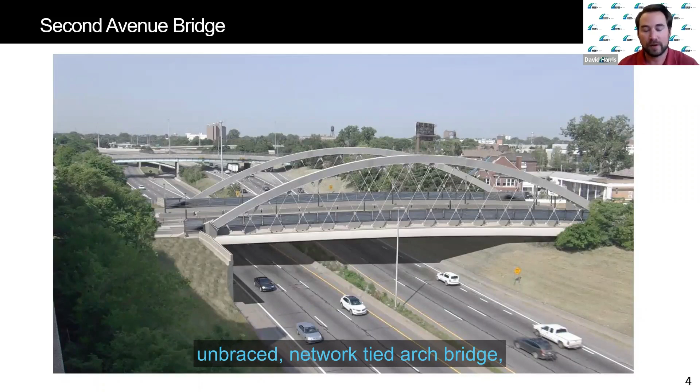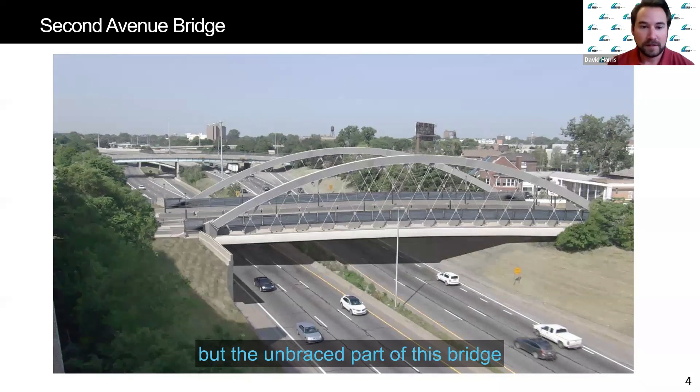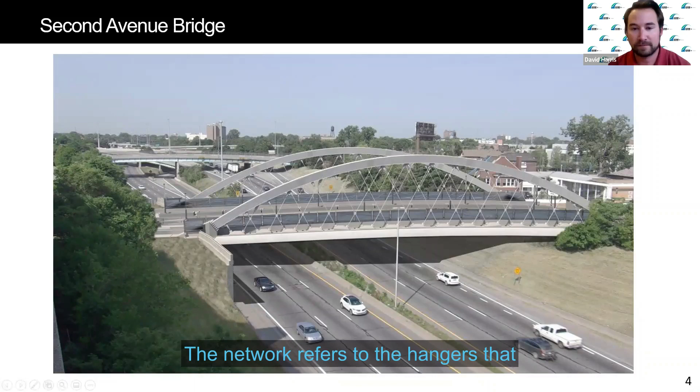I'll try to explain what that is a little bit here without getting too much into the weeds. The skewed part you'll see in another slide or two, you'll see what the deal is there. The unbraced part of this bridge refers to the arches and how they are not connected at the top. The network refers to the hangers, the hanger cables that you see in the crisscross pattern here that connect the arch to the concrete at the bottom.

I guess the tied arch part of this structure refers to how the arches anchor into the corners, the four corners, and then is connected with a tie girder, a concrete tie girder, across the bottom there.

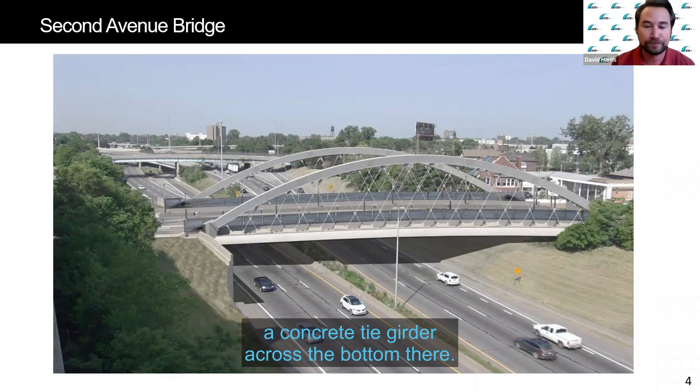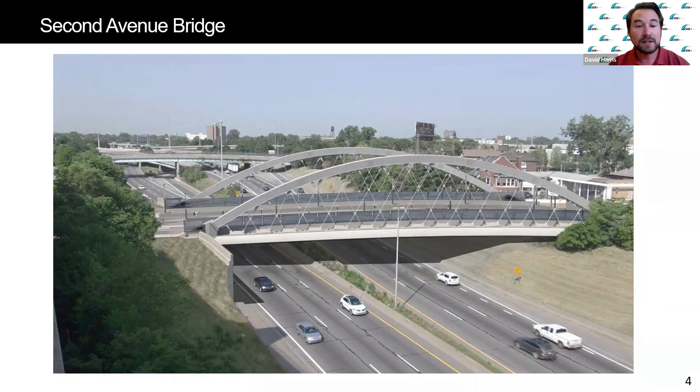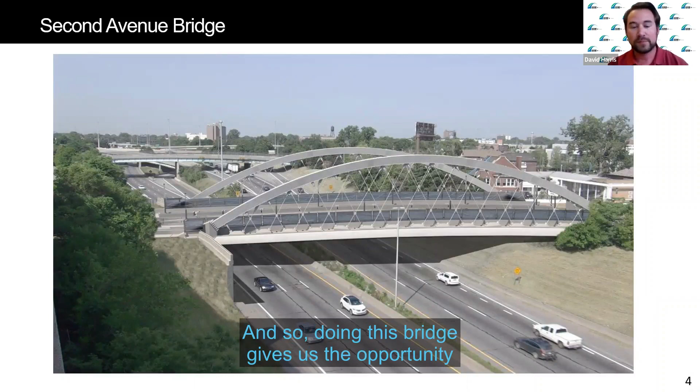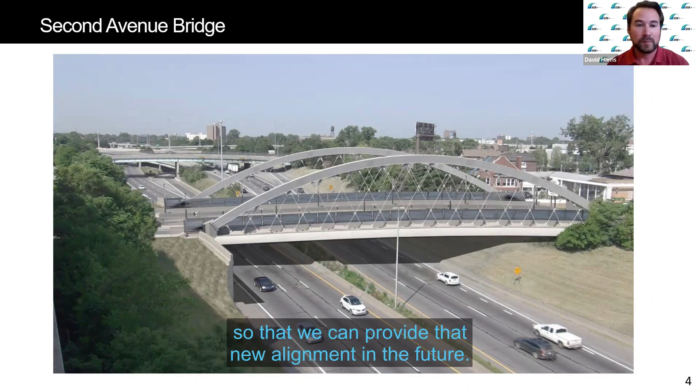This structure was chosen for 94 in this area because of the future interchange that we're going to change there at the Lodge. Could you go back there? Thank you. So for the interchange there on 94 at the Lodge, we need to have flexibility to be able to change that interchange with I-94 going under this bridge since it's so close. Doing this bridge gives us the opportunity to not utilize the center pier or any other pier supports in the I-94 freeway area so that we can provide that new alignment in the future. All right, next slide, please.

So as Bradley mentioned, we're building this bridge off-site in Wayne State University parking lot between Anthony Wayne and 2nd Avenue along Palmer. The first major reason why we did this is due to safety. We didn't want to have some of these major things going on building this bridge anywhere near traffic or people.

Thirdly, one of the other reasons why we did it this way is because we could build this part of the structure in the parking lot next to the freeway while also building the abutments or foundations of the bridge along 94. So those are the three major reasons there.

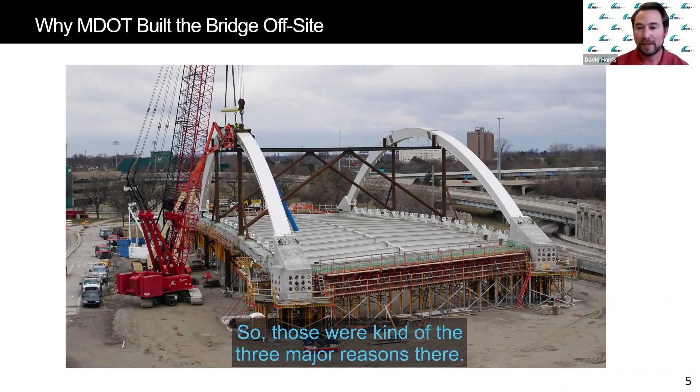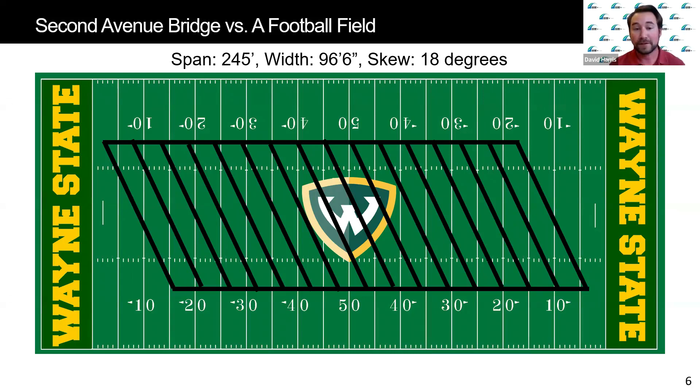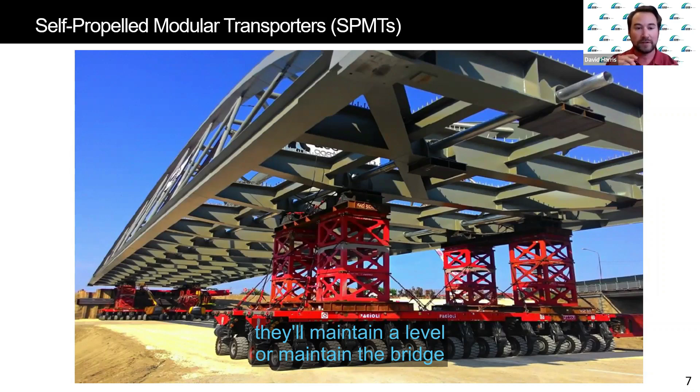So how are we going to move this bridge? That's with these self-propelled modular transporters, or SPMTs. What essentially will happen is we'll lift the bridge up using hydraulic jacks in each corner, then drive these SPMTs into place and set the bridge down onto them in the parking lot. These SPMTs are all interconnected by one operator who will essentially drive the bridge into place over 94. They're automated in a way so that when driving over the grade, they'll maintain a level and keep the bridge level so we won't have any twisting or racking, which could damage the structure.

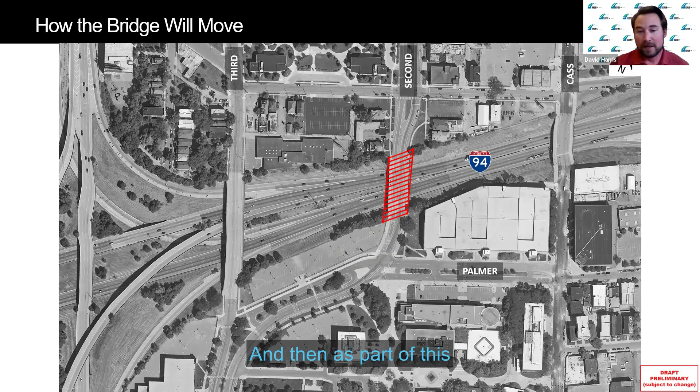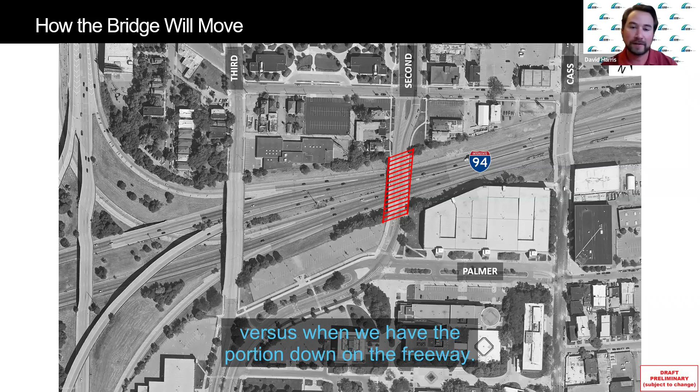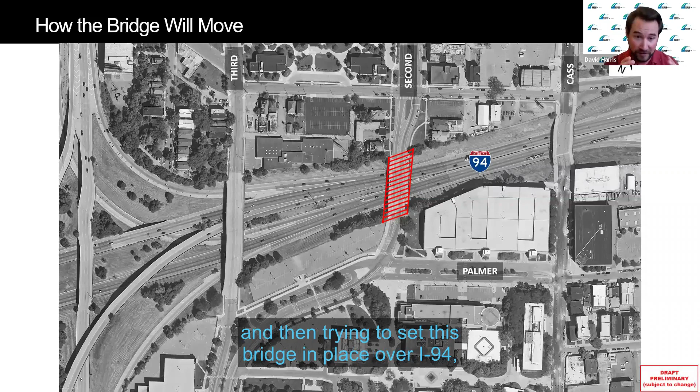As part of this, there's going to be a lot of setup and takedown with those SPMTs — taking things apart and putting them back together for when we have the portion in the parking lot versus when we have the portion down on the freeway. In all, the move will probably be about a day up top in the parking lot actually moving, maybe a day on the freeway actually moving, but there's going to be a lot of moving pieces setting up, taking down, and trying to set this bridge in place over 94. That's going to take a lot of time before we're comfortable opening to traffic.

And I think that segues into this next slide — we need these closures, a 7-day closure on 94, and then later another 5-day closure to be able to do all of this safely. That's the key thing here with this move.

We want to make sure that we're able to thoroughly inspect this thing from start to finish, from when we pick it up all the way to when we make the turn at Palmer Ave, 2nd Ave area, and then when we launch it across the freeway. We need to make sure we're not seeing anything that gives us concern, so we can take care of it before we get it over the freeway. We're trying to make sure everything's looking good on this bridge at every step.

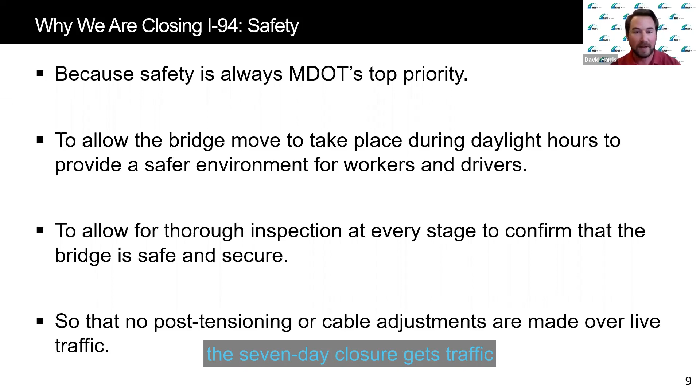The 7-day closure allows the workers to work during the day, and allows our inspectors and designers to watch this thing every step of the way. The 7-day closure also gets traffic out of this whole area between the Lodge and the I-75 freeways along 94, so no traffic will be anywhere close to this thing when it's moving, meaning there's no conflicts there.

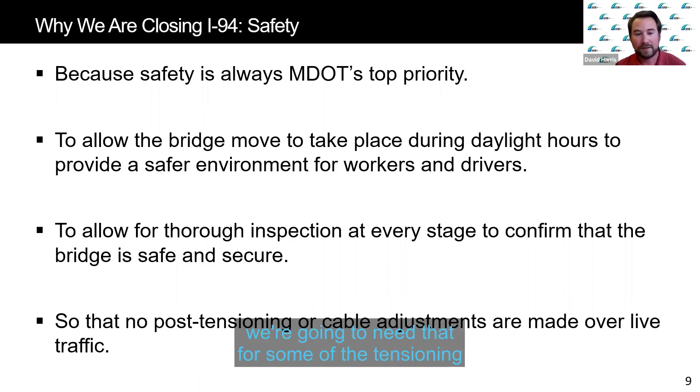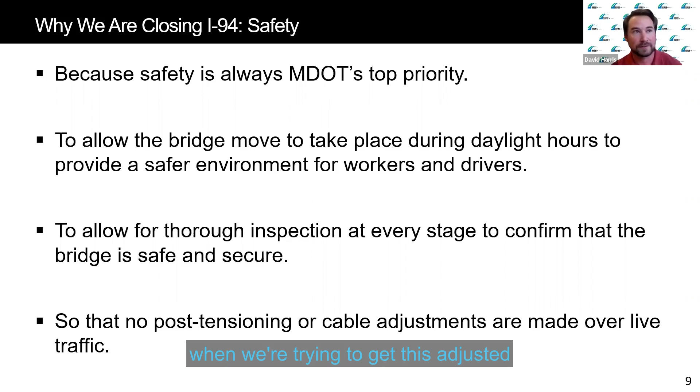And then there's that other 5-day closure I mentioned, which we'll need for some of the tensioning and cable adjustments we'll need to do on this bridge later on down the road. We don't want any traffic near this thing when we're trying to get this structure adjusted to its final resting place.

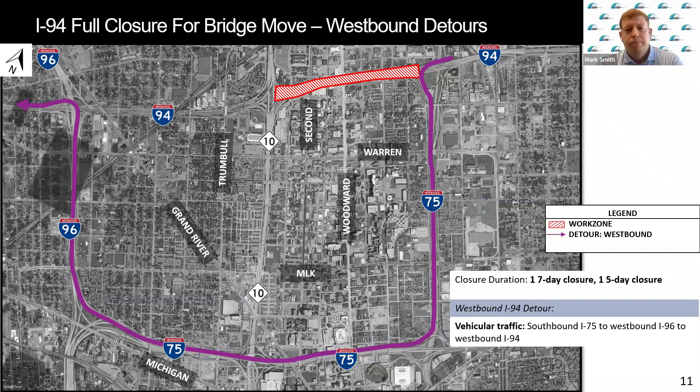For traffic on I-94 westbound, traffic will be detoured as they approach the I-75 interchange, with signing directing them to follow I-75 south and continue through the 96 interchange. At 96, you will get on westbound I-96, which will then take you back up to westbound I-94. Next slide.

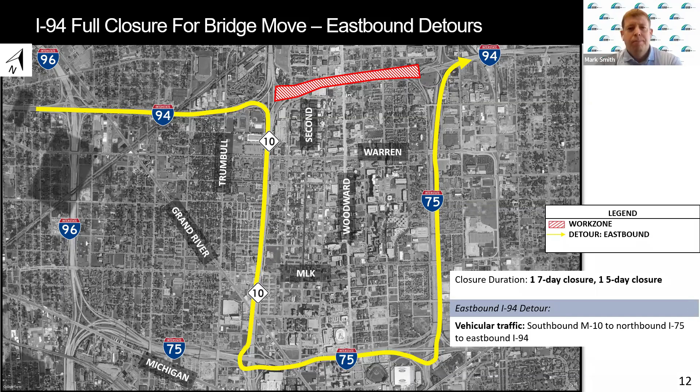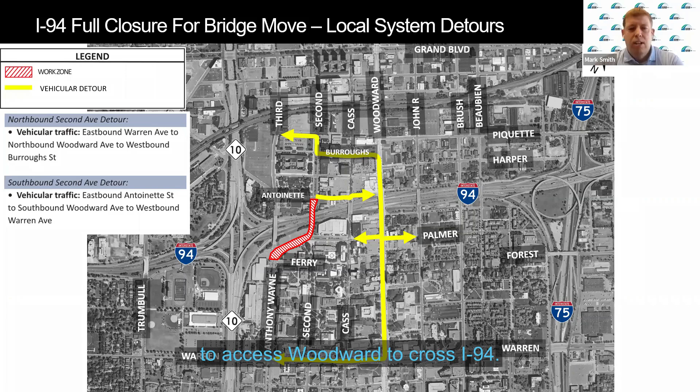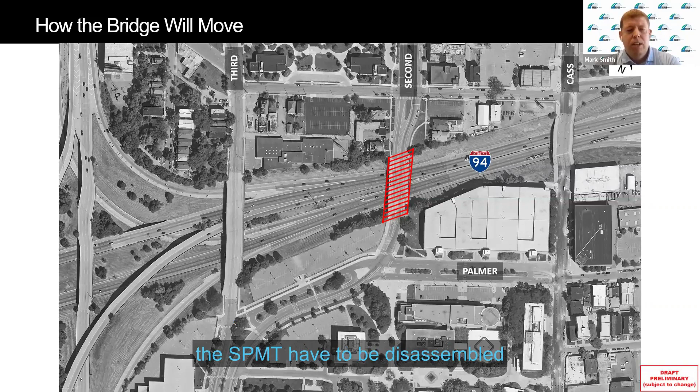As David mentioned, the process of moving the bridge in place with the SPMTs is very slow. Once the bridge is aligned with 94, the SPMTs have to be disassembled and moved down to 94 to continue the move across I-94. And then even after we get the structure over I-94, it still needs to be lowered to the street level of 2nd Avenue and set in place.

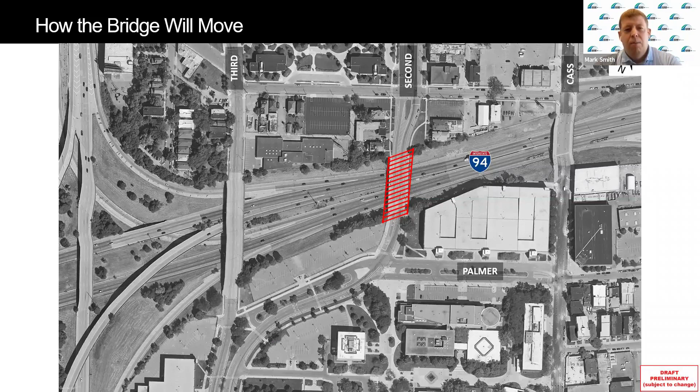Through that process, MDOT and their contractors are continuously inspecting everything, making sure that there's no excess stress being placed on the bridge, rather than trying to cram that into a weekend. Working essentially 24 hours a day is not a good practice for something this complicated. So by closing the freeway for a week, it allows MDOT to complete this work during daylight hours and really take their time and not rush this process, making sure that it's safe and secure before we open traffic back up to I-94.

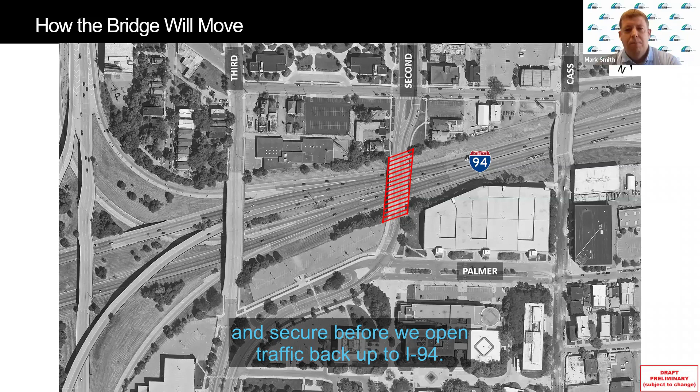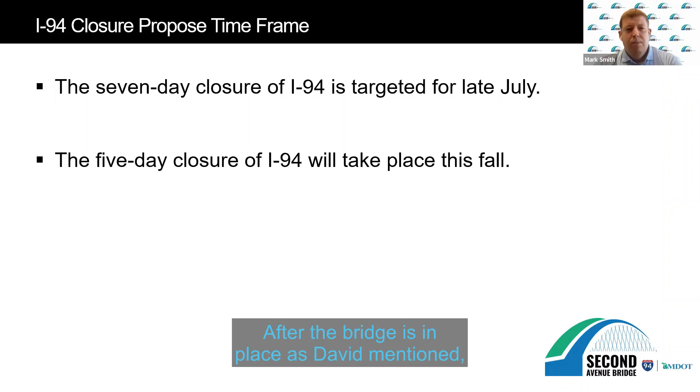As we discussed, there will be a 7-day continuous closure to move the bridge in place. MDOT is still working to finalize those dates with their contractor, but we're targeting late July. After the bridge is in place, as David mentioned, there will be a future closure for the tensioning of the structure, which we estimate will take place later this fall. Once those dates are finalized, we'll communicate that through our media sources, and the I-94 project team will get that out to everyone to make them aware of that closure.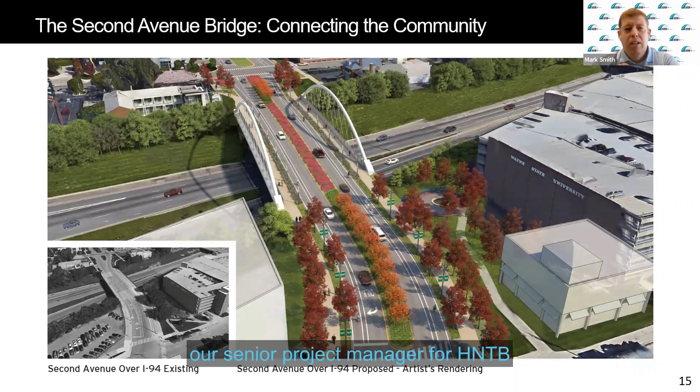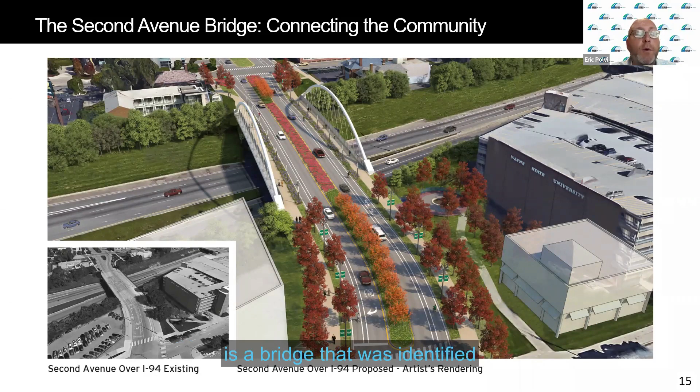Thanks, Mark, and welcome everybody to the meeting today. You can see on the screen here what 2nd Avenue will look like once the bridge is moved and all the roadway work is complete. 2nd Avenue is technically considered a community connector bridge in this corridor. A community connector bridge is a bridge identified by the community and stakeholders as being one of the highest used bridges, and to enhance connections across the freeway. So the bridge was designed with that in mind.

It was designed with enhanced non-motorized accommodations and improved aesthetics on the bridge structure itself. You will see on the bridge there will be one 10-foot lane in each direction. The lanes are a little narrower on the bridge to slow traffic down, since there's some concerns in the city about high traffic speeds in the corridor, so 10-foot lanes will help reduce traffic speeds here. Also, on the outsides of the bridge, we'll be installing 5-foot bike lanes on both sides with a 3-foot buffer between the traveled lane and the bike lane, to provide a little more safety for the bicycle user.

The sidewalks are also wider than on other bridges in the corridor. We'll be providing a 9-foot sidewalk on the bridge. 2nd Avenue, along with 3rd and Cass, are pretty heavily traveled pedestrian corridors, so having a wider sidewalk will help enhance that movement across the bridge.

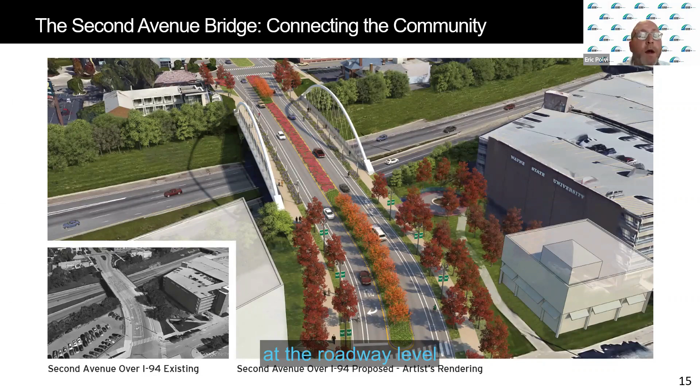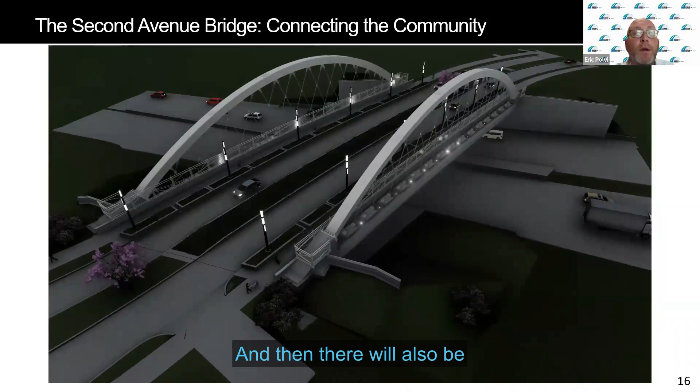You'll also see, maybe it's a little hard to see, but there'll be lighting on the bridge itself at the roadway level, which will enhance public safety. Those columns on the bridge will provide illumination not only at night but during the day to provide some safety for pedestrian crossings. There will also be lighting on the outsides of the bridge, shining up at the network arch cables, as Dave mentioned earlier, really providing a pretty dramatic look during evening hours.

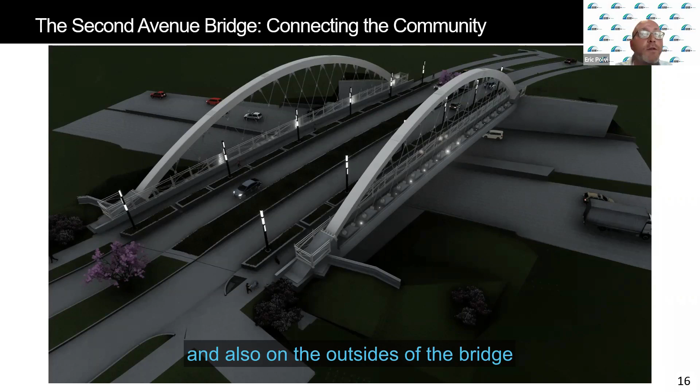And then last but not least, there'll be landscaping installed in the median of 2nd Avenue and also on the outsides of the bridge in those planter boxes you can see. So hopefully it provides a very nice community connection across I-94, and those are the benefits.